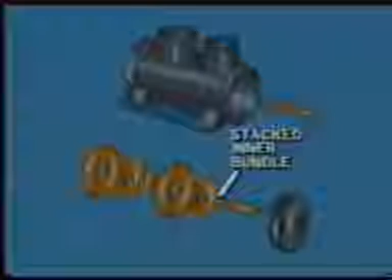Assembling and disassembling the casing requires a piece-by-piece assembling and disassembling of the rotor as well.

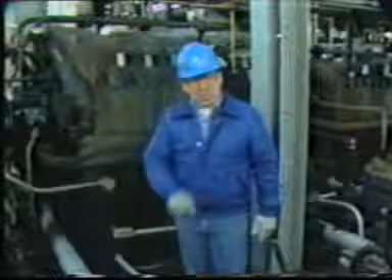Now that we've seen the outside of the compressor, let's take a closer look at the internal components. Inside the casing is the rotor. Rotors usually consist of a solid center shaft with impellers keyed and pressed onto the center shaft.

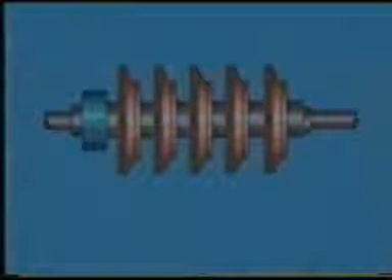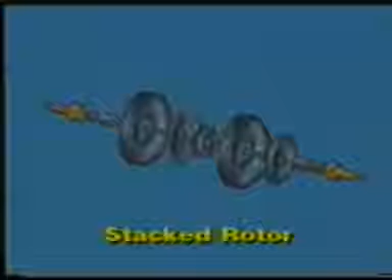In most centrifugal compressors, rotors are built with a balancing piston installed at the discharge end to relieve the thrust-bearing load. Stacked rotors consist of a stub shaft for each end, several impellers, a balancing piston, spool pieces, and other needed parts, all held together with a heavy center bolt.

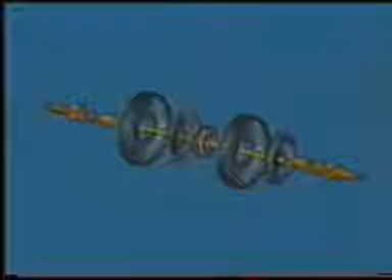Although this type of rotor is always used in a stacked style vertically split casing, it can also be used in other types of casings as well.

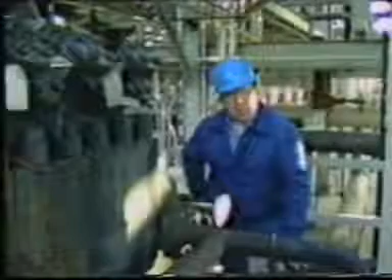The impeller is the most critical part of a centrifugal compressor because its size, shape, and speed determine the compressor performance. Most often you'll find two types of impellers, closed and semi-open.

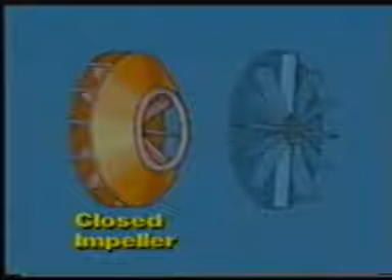In a closed impeller, shrouds cover both sides of the blades. On one side, a central hole or eye allows gas to enter the impeller. But closed impellers are the most common and are mainly used in multi-stage compressors.

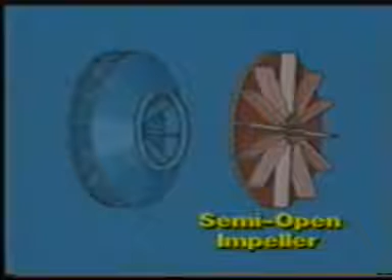In the semi-open impeller, a shroud completely covers and forms a solid backing for one side of the blades. Semi-open impellers are used for large gas flows and are generally used only on single-stage compressors.

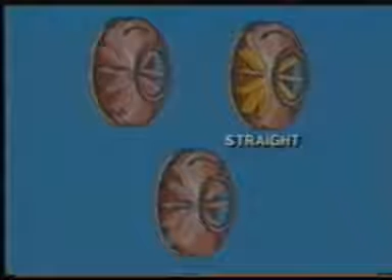The blades, or vanes, on an impeller can be straight, curved forward, or curved backward. Backward curved vanes are the most efficient and stable.

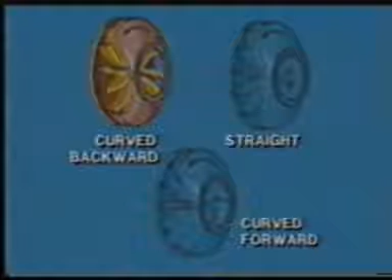However, since backward curved vanes cause the gas to leave the impeller with less velocity, there is less velocity to convert to pressure. Most oilfield centrifugal compressors use the backward curved vane impeller.

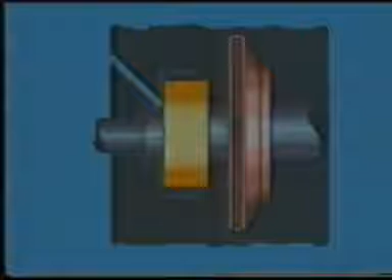The balancing piston is fixed to and rotates with the shaft. It is surrounded by a seal that minimizes leakage from the upstream side of the shaft to the downstream side.

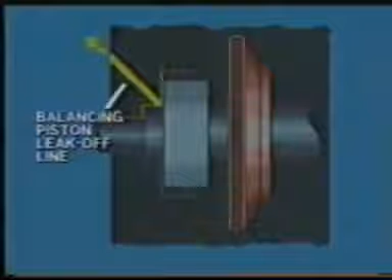The downstream side of the balancing piston is piped back to the compressor's suction side through a balancing piston leak-off line. This causes a pressure difference across the piston that provides a net thrust on the shaft to compensate for the thrust being exerted on the impellers.

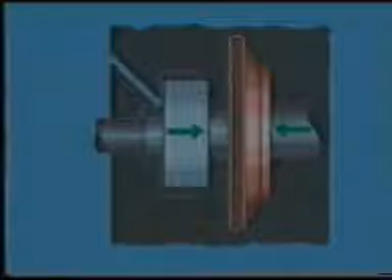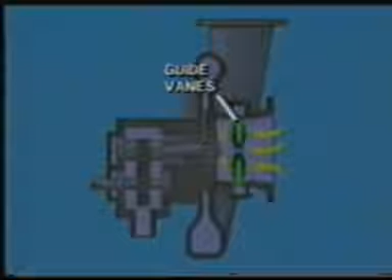Near the inlet and between stages of the compressor are guide vanes. They're used to direct the flow of gas into the eye of the impeller at just the right angle. This is important because efficient performance and stable operation of the compressor depends on the velocity and direction of the gas entering the impeller eye.

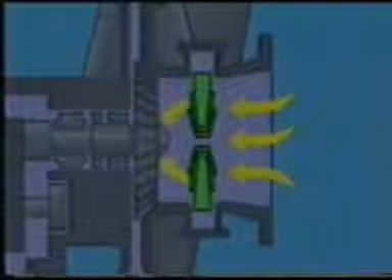Guide vanes can either be fixed or adjustable. Adjustable guide vanes are usually available on single-stage compressors and are sometimes used in the first stage of multi-stage compressors. These vanes can either be adjusted manually or automatically to control the angle of the gas flowing into the eye of the impeller to keep it running stable and efficient over a wider operating range.

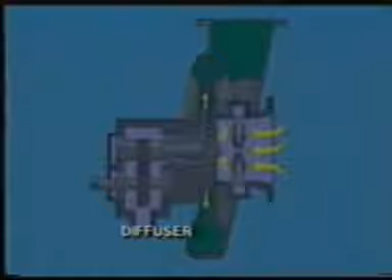As the gas leaves the impeller, it's forced into a passageway in the casing called the diffuser. The diffuser forms an increasingly larger path for the gas to flow through.

Now let's look at how each stage in a multi-stage centrifugal compressor is separated from the next. All the parts that make up one stage of a multi-stage centrifugal compressor can be found on a single-stage compressor. One stage is separated from the next by a specially designed part of the casing called the diaphragm.

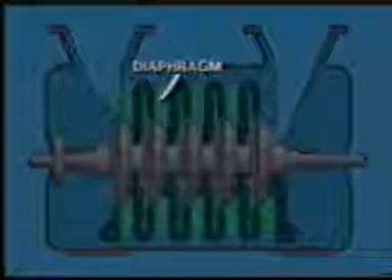The adjacent walls of individual diaphragms form a diffuser passage. After the gas travels through the diffuser, it passes through the return channel of the diaphragm.

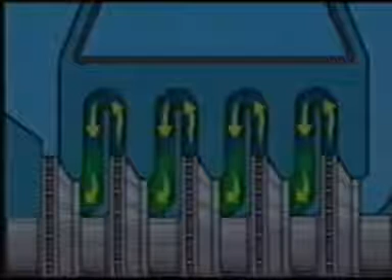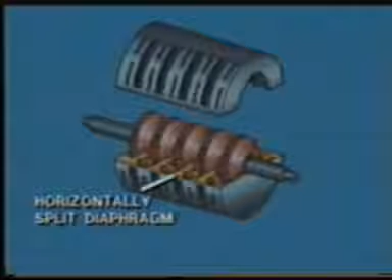Diaphragms can be horizontally split or fully circular. In large horizontally split compressors, the heat from gas compression can cause the case to expand, which in turn expands the diaphragms. If this happens, lower gas pressure and leaks could result. Sometimes this problem is corrected by circulating cooling water through the channel.

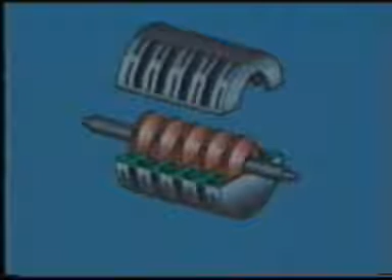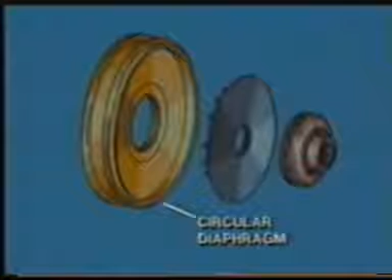In stacked casing designs, the diaphragms are one piece and therefore provide greater stability and strength. In addition, the one-piece design eliminates interstage leaks and helps contribute to higher efficiency.

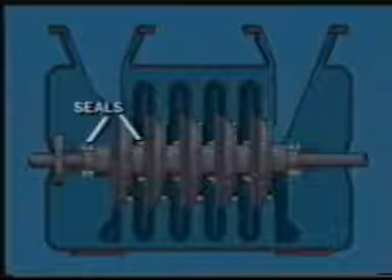Most compressors need some type of sealing to keep the compressed gas from leaking out of the compressor and to prevent leaking between stages. Particular care must be taken when the gas is combustible. That's one reason why seals are so important. Let's examine some of the types used.

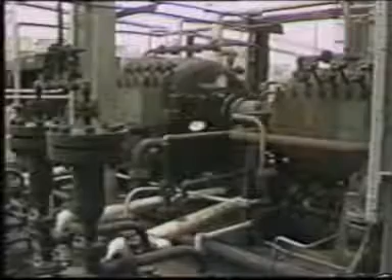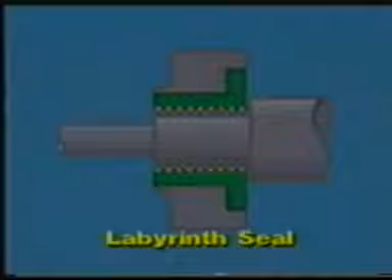The most common types of seals are the labyrinth, liquid film, carbon ring, and mechanical. The simplest type of seal is a labyrinth seal. It has a series of grooves machined to sharp knife-edge thickness that maintain a close clearance to the mating part.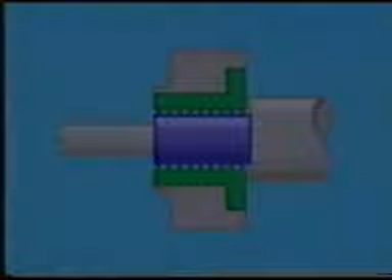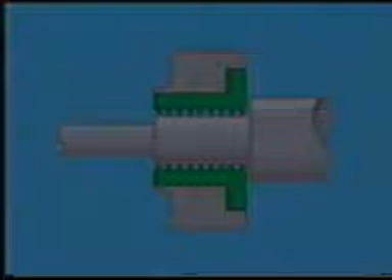It can either be stationary or rotating. The mating parts are made of a softer material such as babbitt, so they will wear before the labyrinth does. Labyrinth seals can be found in multiple, stepped, and interlocking configurations. Sometimes carbon rings are included with the labyrinth seal.

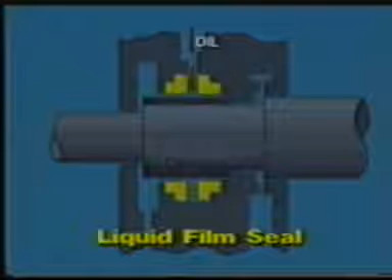On high pressure and heavy-duty compressors, liquid film seals are the most common. A typical seal consists of 2 or more rings that don't rotate, but are free to float with shaft movement. Oil is injected between the rings at a pressure higher than the compressor suction pressure. This allows the oil to flow between the seal rings and the shaft and then into the oil drains.

Labyrinth seals guard against any oil leakage into the gas stream.

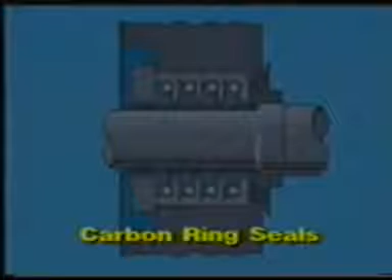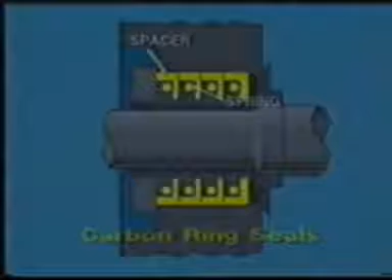Emission regulations sometimes require the use of liquid film seals. These seals provide a barrier fluid which prevents leakage of processed gas to the atmosphere. Carbon rings, on the other hand, are dry contact seals, consisting of several high-quality carbon rings held in place by stainless steel spacers and axial springs. The entire seal assembly can be removed from the compressor when worn or broken segments need replacing.

In some applications, a buffer gas is used in conjunction with the carbon rings to separate the gas in the compressor from the surrounding atmosphere. Also, you'll find combinations of carbon rings and labyrinth seals are also used.

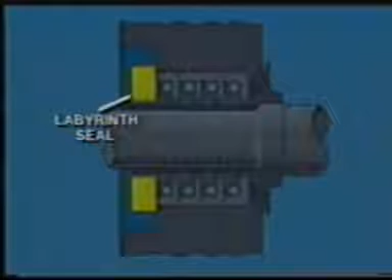Another type of seal is the mechanical contact seal. It consists of machined rotating and stationary surfaces that remain in direct contact with one another to prevent leakage. Mechanical contact seals are primarily used for low-pressure gas that has no corrosive components.

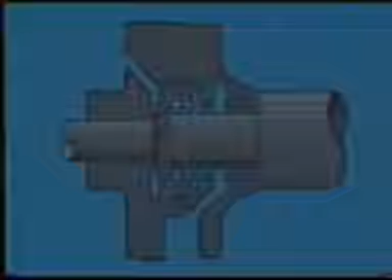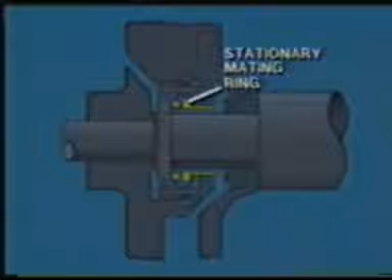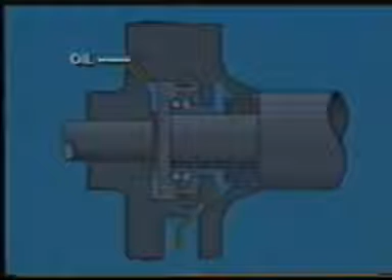One typical form of the seal uses a rotating contact ring, a full floating carbon wear ring, a stationary mating ring, and a spring-loading device. A small quantity of lubricating oil is used to remove frictional heat. This type of seal provides some sealing whenever the compressor is shut down.

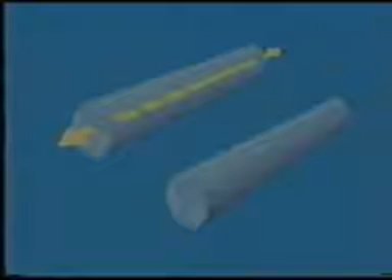Not only do we have to seal against leaks, but we have to guard against any unwanted movements of the shaft as well, and that's where bearings play an important part. Inside the centrifugal compressor are forces that tend to cause the shaft to move in a forward and backward direction, commonly referred to as axial motion, and a side-to-side direction, commonly referred to as radial motion. For example, an unbalanced impeller can cause radial motion.

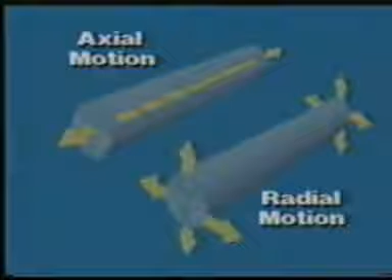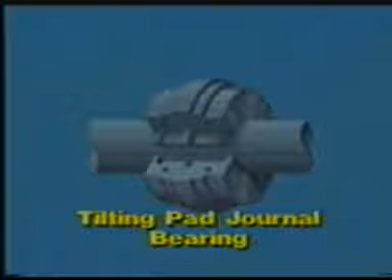Self-aligning tilting pad bearings are used to support the shaft and prevent radial and axial motion. In most large centrifugal compressors, a tilting pad journal bearing is used. This type of bearing is designed to prevent the rotor oscillations associated with the standard sleeve-type journal bearing. As the shaft rotates, a wedge-shaped film of oil produces a stabilizing force that tends to reduce vibration. This self-aligning property will compensate for any misalignment and will tend to distribute the loads evenly.

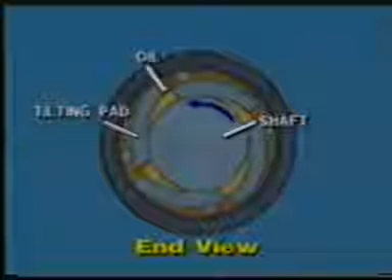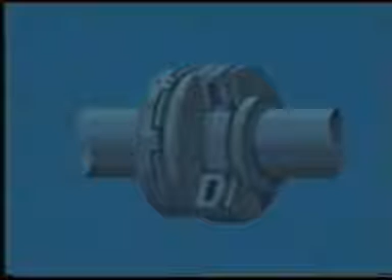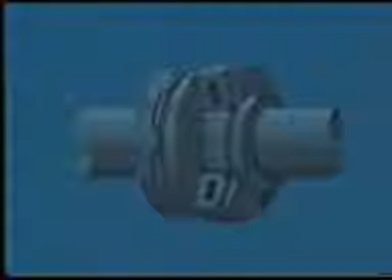To control the axial motion of the shaft, thrust bearings are used. They are usually of the double-acting tilt pad design, so that thrust loading in either direction can be supported. A typical thrust bearing has a thrust collar attached to the shaft and thrust shoes arranged in a circular bearing case. Between the thrust collar and thrust shoes, an oil film is used to support the thrust load.

Almost any large machine needs some type of lubrication, and the centrifugal compressor is no exception. Without the proper lubrication, frictional heat could build up to a dangerous level, possibly damaging the compressor. That's why lubrication systems are so important. Most centrifugal compressors use external lube oil circulation systems to lubricate and cool all bearings and gears in the compressor and accessory drivers.

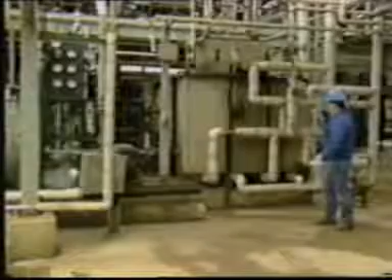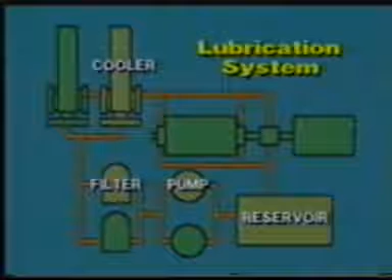A typical lubrication system consists of an oil reservoir, an oil pump, a filter, and a cooler. Inside the reservoir, special baffles are built in to prevent the oil from foaming. Now here's how the lube oil system works: oil is pumped from the reservoir through a filter to a cooler, where it is cooled to the correct operating temperature. This cooled, clean oil then flows under pressure to each bearing through holes and grooves. Gravity allows the oil to make its way back into the oil reservoir, where the cycle starts all over again.

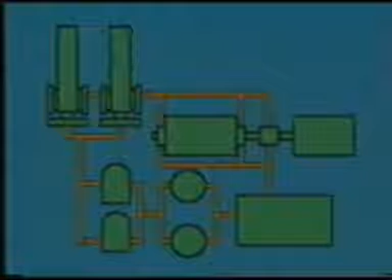Most lube oil systems also have an auxiliary pump and dual filters. These help give added protection to the lube oil system.

Now let's look at another circulating oil system, the seal oil system. Oil film seals are used on many compressors to positively seal the production gas inside the casing. In some situations, a separate seal oil system is used. However, in most cases, a combination lube oil and seal oil system is used. Sometimes a buffer gas system might be used along with the lube oil and seal oil system, if necessary.

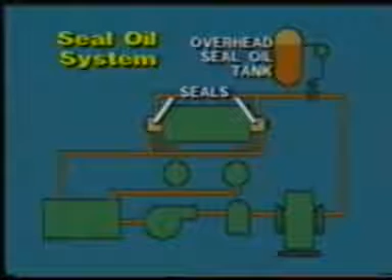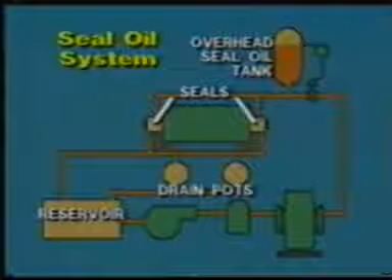Seal oil enters the space between the seal rings from an overhead seal oil tank. Oil which has been used only for lubrication drains back to the reservoir. Seal oil, which may have come in contact with gas, drains into drain pots for removal of the gas. The separated oil is then returned to the reservoir for recirculation.

One thing you should always remember about lube and seal oil systems: always make sure that any oil removed from the sumps or reservoirs is disposed of using approved methods.

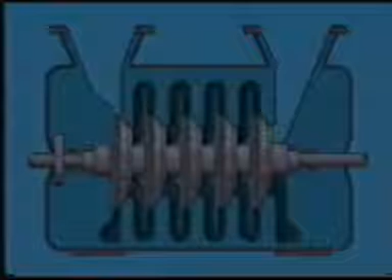You've seen how the lube oil system helps lubricate the working parts of the compressor and reduces heat from friction. Now let's look at how we reduce the heat in the gas we compress. Heat is generated when gas is compressed. That's why for safe and efficient operation of the facility, the compressed gas must be cooled. Also, high gas temperatures make it difficult to lubricate the bearings and other moving parts. This is particularly true if the gas is to be recycled through the compressor, because hot suction gas will overheat the compressor and cause serious damage.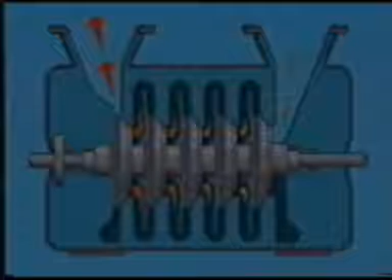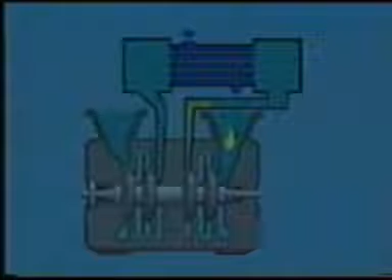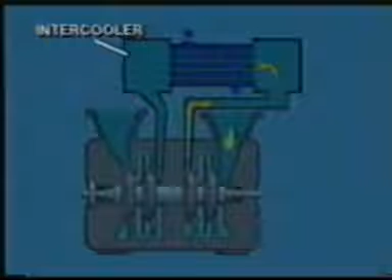In many large compressors, the gas flow is changed from the typical straight-through arrangement. The gas is actually taken out of the compressor at an intermediate pressure and circulated through a heat exchanger called an intercooler. Here, the gas is cooled before it is returned to the compressor at another point. On very large multi-stage compressors, there may be several intercoolers.

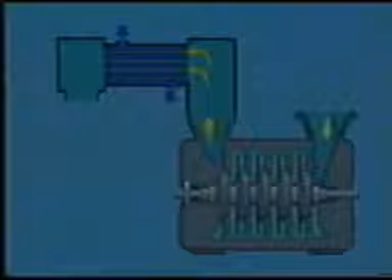Even with intercooling, discharge gas may still be too hot for delivery. In these cases, the discharge gas is passed through a heat exchanger or aftercooler before it's delivered to the pipeline.

In this section, we've shown you in detail all the parts that make up the compressor and what they do, and we've taken a brief look at its auxiliary systems. In our next section, we'll be getting familiar with drivers, couplings, and controls.